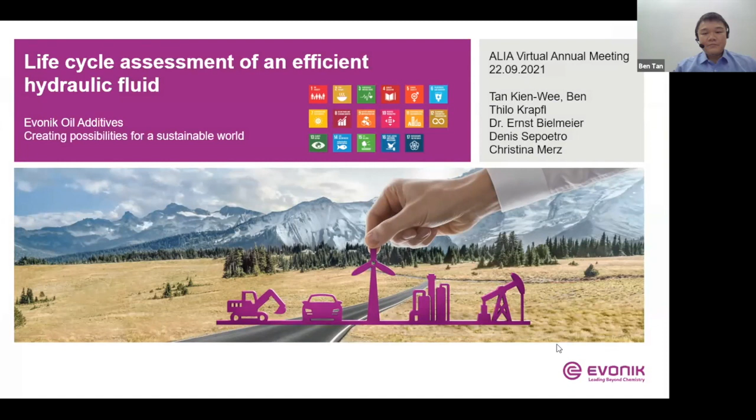Good afternoon again. The topic I'm going to deliver today is the life cycle assessment of an efficient hydraulic fluid. So what does it encompass?

When we talk about this life cycle assessment, throughout this entire presentation we're going to hear the word sustainability or sustainable many times. The Brundtland Commission, in 1987, published their first report called Our Common Future, and in there they defined sustainable development as development that meets the needs of the present without compromising the ability of future generations to meet their own needs.

Moving on to the next slide, the concept of sustainability is composed of three main pillars: the economic, the environmental, and the social.

In another way of defining it, we can also call it profit, planet, and people. There have been people, or even organizations, who think that the planet, the people, and the profit cannot coexist—that you either have profits for your organization, or you take the other route to have a more sustainable planet. This is actually a very common misconception.

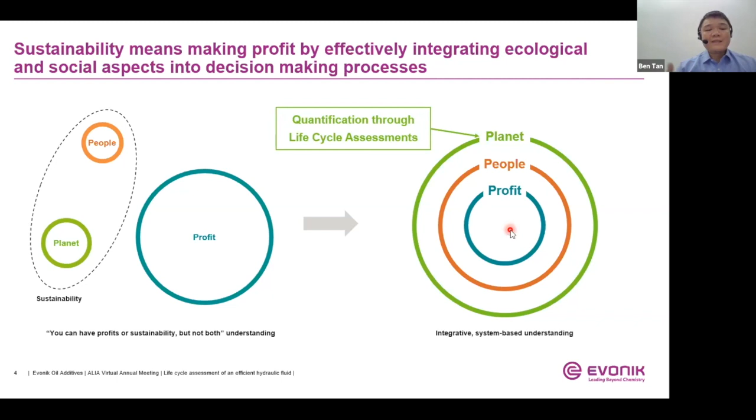Moving on next, I would like to talk about life cycle thinking. When we talk about life cycle thinking, it goes very well beyond just talking about the market price of a product, the quantities, or even the product specifications. It is actually a much more comprehensive product characterization, going all the way from the raw materials used to make it, to the product's end of life. So we can compare various process routes for the same product, or compare alternative products with the same benefit to the customer.

One important aspect of LCA is that it can expose the weak spots and indicate potential areas for improvement, to bring future developments to better a product or come up with even higher performing products. So this approach is not only looking at the usage of the product or the benefits it brings today in a specific application, but it also leads to how the innovation cycle and development of newer products goes into the future.

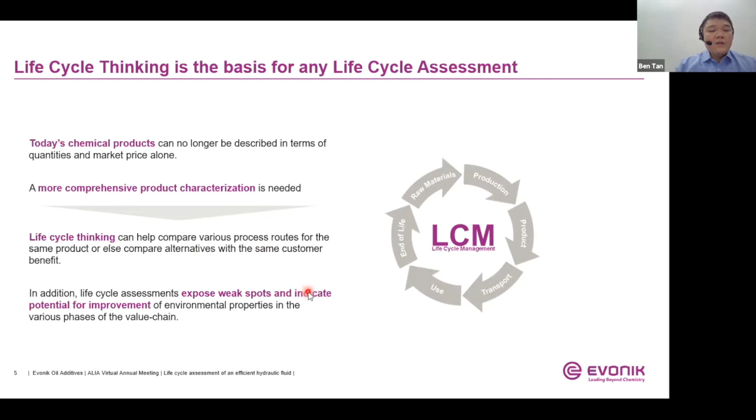In the next slide, I want to help you understand the different terminologies used in the different steps of life cycle assessment. I'm using the example of a typical process chain of production and the use of a material. When we only look at the production itself, these steps are called gate to gate in a life cycle assessment. As we move on to include the material supply as well, and then the production of the product, this will be called the cradle to gate step.

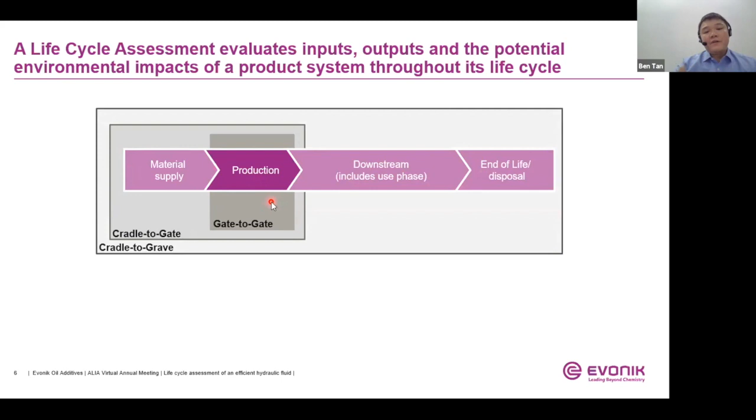If we look even further downstream of the products, including the use phase as well as the end of life of a product, or simply the disposal stage, we call this the cradle to grave. And when there's a possibility to also look at recycling the product when it reaches end of life, or reuse it as a raw material to make the next batch of product, this will be a complete cycle in the LCA, called the cradle to cradle step.

This LCA is basically an ISO 14040 series of standards, meaning all the way from the raw materials acquisition stage or generation from natural resources, to the final disposal stage of the product. In an LCA, various potential environmental impacts are analyzed, and I will come back to this later when we touch more on this.

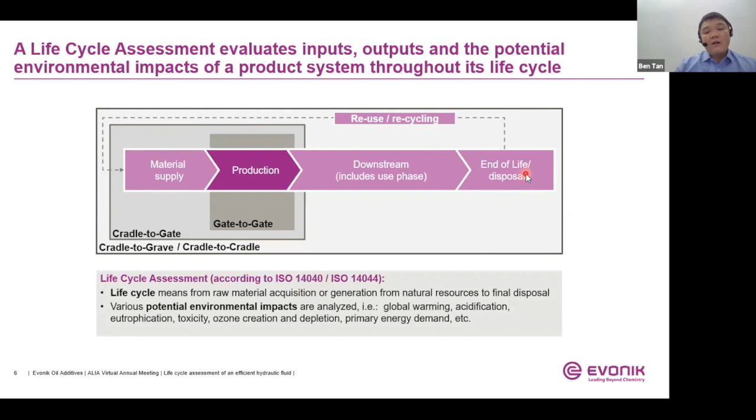The next thing I want to run through quickly with you is the life cycle assessment - how to do it, basically. According to ISO 14040, it comprises 4 steps. The very important first step is the goal and scope definition. The context of the study has to be first defined, meaning that we define the system boundaries.

For example, do we want to take into consideration the entire value chain of the product, or is it sufficient to just focus solely on the cradle to gate perspective? These are the very initial definitions, and the goals or scope that need to be identified. And then the functional units - this is important because it is the basis used to do all the calculation and to be referred to compared to certain systems. I'll come to that in the next couple of slides.

Finally, this will be followed by the life cycle inventory analysis. What happens here? In the LCI, life cycle inventory analysis, we basically quantify the inputs as well as the outputs that we are going to assess. Then after that, we move on to the life cycle impact assessment, where we try to get understanding of the impact of materials and energy flows on environmental systems. These two, life cycle inventory and life cycle impact assessment, are much more objective because they can be quantified.

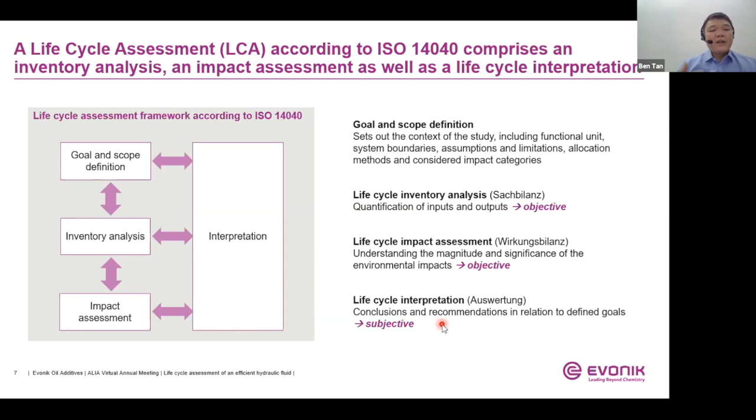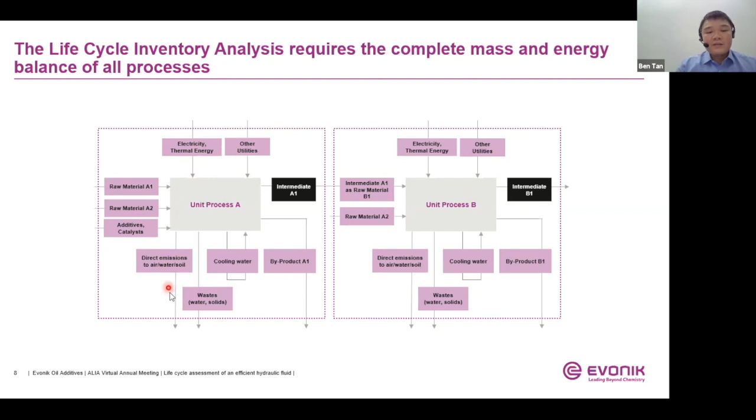Then we develop what are the data collection methods, before we finally execute the relevant inputs and outputs data collection. So like the electricity being used to produce the products and the thermal energy, and then what are the direct emissions into air, water or soil as a result of the product that's being made.

So when it comes to this slide, it's to give you a deeper understanding about inputs and outputs data. Inputs are the raw materials, for example, and what are the primary raw materials that could be used, and whether the raw materials are using renewable raw materials like palm oil because they are renewable, and this should be the main raw materials.

And then what are the auxiliary materials that could be also used as part of the additives to make a product, in order to enhance a product, maybe certain characteristics to make it more sellable, but it plays a minor role in comparison to the main raw materials. And finally, the utilities, including thermal, electrical energy, compressed air, cooling water, and many more.

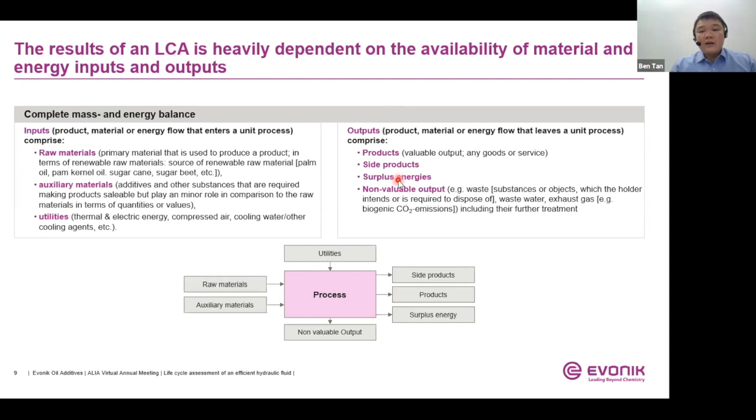So then on the output side is about the product itself - what are the valuable outputs coming from the products, goods or service being offered. And then what are the potential side products that may be churned out during this process. And then sometimes there will also potentially be surplus energy generated. And finally, also potentially the non-valuable outputs, such as waste that is generated or emissions going into the environment.

So there are other methods or methodologies that look at the damage categories - what damage it causes to human health, what damage it can potentially cause to the natural environment or natural resources. So they are quite different. Experts in the community are working diligently to develop this methodology, and they're trying to link them together, the midpoint categories and the damage categories.

At the moment, this is still a work in progress, but it will develop over time. LCA will become more and more objective in the future, and less subjective. But until then, it is very important that when we do an LCA, we need to first define the system boundaries. That's very important right at the beginning, in order to ensure that the comparison we do is eventually quantifiable.

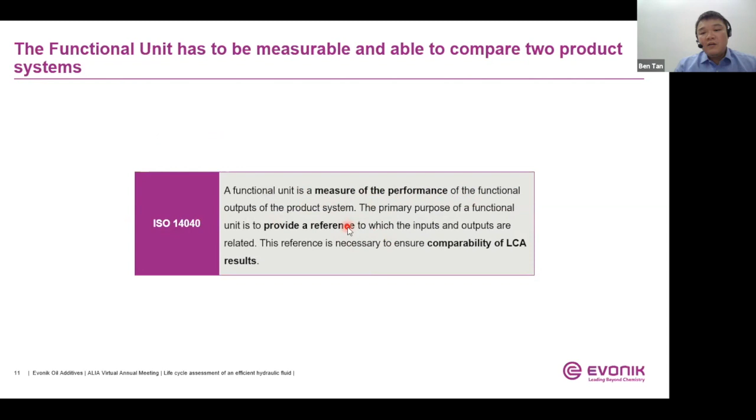In the example I will deliver today, the functional unit is a hydraulic fluid system of a mid-sized excavator, and we are talking about one typical oil drain interval of 2,000 hours. This mid-sized excavator basically uses about 260 liters of hydraulic fluid.

In the system here, we have the monograde hydraulic fluids, and then a multi-grade but shear stable hydraulic fluids. The monograde hydraulic fluid system contains a standard anti-wear package and mineral base oil. Whereas the multi-grade shear stable hydraulic fluid, apart from having the standard anti-wear package and mineral base oil, also consists of a certain percentage of shear stable viscosity modifiers.

As a result of this, we went on to do trials in the field. The monograde hydraulic fluid resulted in an average diesel consumption of about 24 liters per hour of work. For the multi-grade shear stable hydraulic fluids, the diesel use is 21.5 liters per hour. So there's an obvious reduction in terms of the amount of diesel being used. By using these exact same functional units, the comparability of the LCA results is going to be ensured.

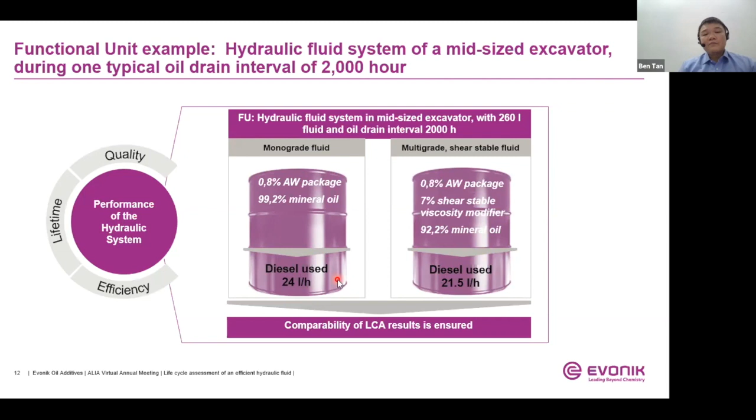But before we look into those results, how does the mechanism work? I'm sure some of you might have already seen this slide multiple times. On this log viscosity versus log temperature graph, there are two very prominent lines: one light gray and one purple. They represent the monograde and the multigrade shear stable fluid respectively. The multigrade shear stable fluid has a much flatter line, due to the higher VI effect.

What it does is allow a wider extension of the whole temperature window, for both the low temperature side and the high temperature side, in comparison to the monograde. But what does this widening window bring? It actually helps improve the hydromechanical efficiency at low temperatures, but on the other hand also improves the volumetric efficiency at the higher temperature side.

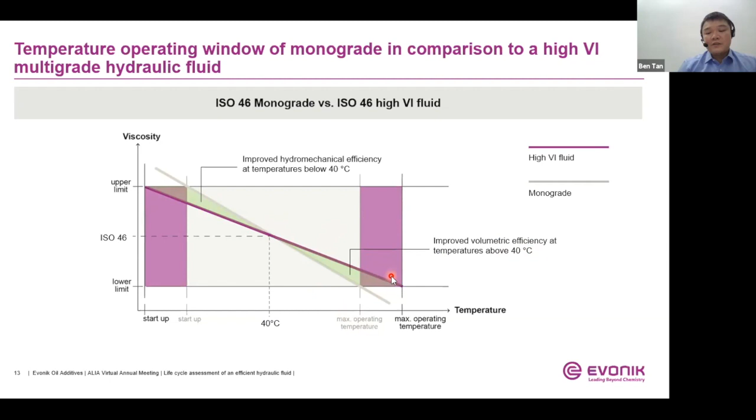By doing so, this multigrade fluid actually led to an improvement in the overall hydraulic pump system efficiency. The trials, or performance demonstrations, were carried out over various years, probably in the last 10 years, at Evonik. We looked at different types of excavators from various OEMs, and there were also specific phases of the test that we had to do.

For example, truck loadings, digging work, traveling, idling. And then there are certain parameters that have to be considered in terms of variations, like the operators, how the engine runs at 100% or 70%, the initial oil temperatures, the starting oil temperatures, and the bucket size that is being used. All these are taken into careful consideration.

Not only that, but during the oil change from one oil to the next oil candidate, we also ensure that this is done properly, in order to make sure that the results eventually gained, the data collected, are representative and significant, and are confident to be used.

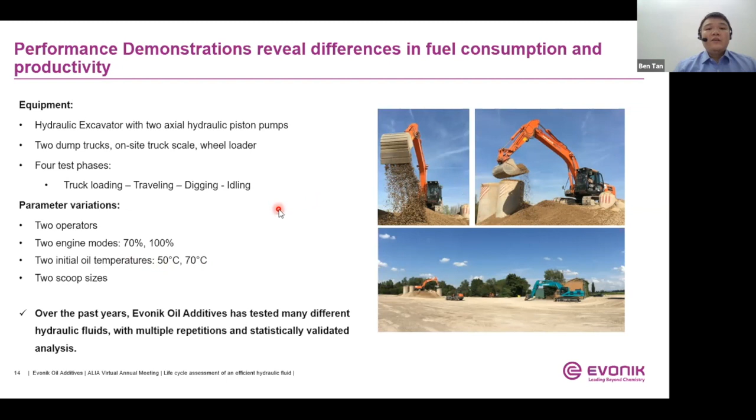Okay, let's look at the next slide. This is the result of the life cycle assessment for the monograde hydraulic fluid. On the right hand side here, you have the value of 238 kilogram CO2 equivalent emitted per cycle.

This is the CO2 emissions from the production of the monograde hydraulic fluids used in that trial. In the trial we also use diesel so that the excavator can operate, and the production of the diesel will also generate a certain amount of CO2, so these are also taken into consideration.

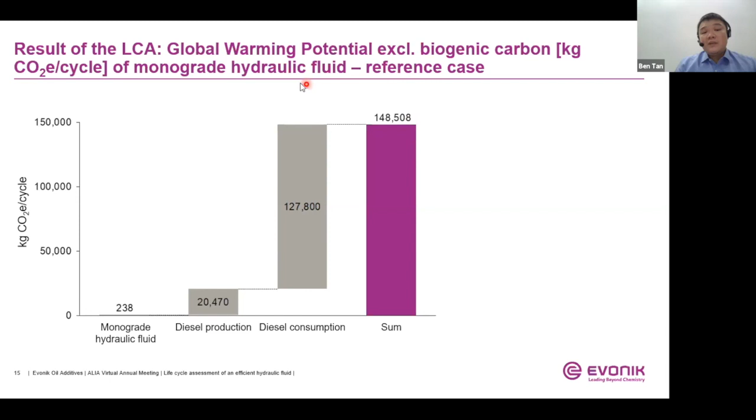Eventually during the excavator operations, it consumes and burns diesel fuel, and this generates a huge chunk of the CO2 emissions. In total, it generates about 148,500 kg of CO2 equivalents throughout these whole operations using the monograde hydraulic fluids.

In the case of the multigrade hydraulic fluid, we're talking about almost the same amount of CO2 emissions from the hydraulic fluid itself, which is 260. The diesel used, so the emission to produce it, is about 18,000, and the diesel consumed during the excavator operation is about 114,000.

This is quite a reduction compared to the earlier monograde results that you saw. In total, it leads to about 132,000 or 133,000 kg of CO2 equivalents emitted per cycle.

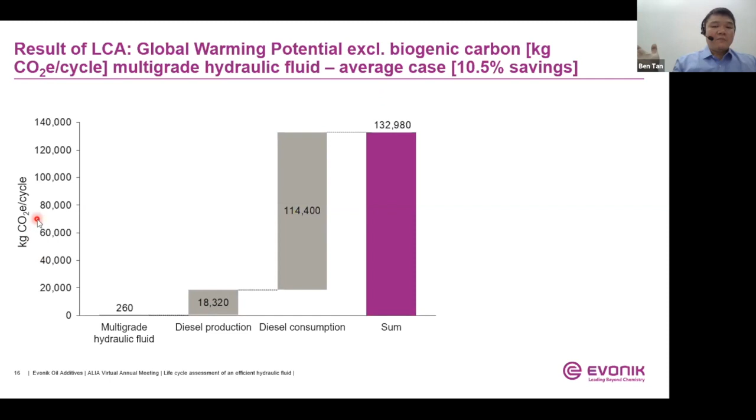There could be very good exceptional cases, and there could be some less than average cases. We should not be taking the best of the whole entire trials over the years. So what we did was actually take an average case, which is about 10% savings in terms of CO2 emissions or reductions.

So comparing them side by side, this 238 kg CO2 is the carbon footprint of the monograde hydraulic fluid itself, and this 260 is the carbon footprint of the multigrade hydraulic fluid. The reductions coming from the use of these multigrade hydraulic fluids is about 10%, which is about 14,800.

If you compare this number, 260 or 238, to the 14,850, it's actually in terms of magnitude almost insignificant, or maybe less significant. Yeah, I should use the word less significant.

But a very important thing I want to highlight is that some people out there actually thought, since the number is so small in magnitude, maybe let us just neglect the carbon footprint of the product itself, and let's talk more about these reductions or potentials of these emissions - this 14,800, or 14,850 reductions, is a term I need to explain to you later, called avoided emissions. That means as a result of using this multigrade fluid, you could have avoided about 14,800 kg of CO2 emission into the environment.

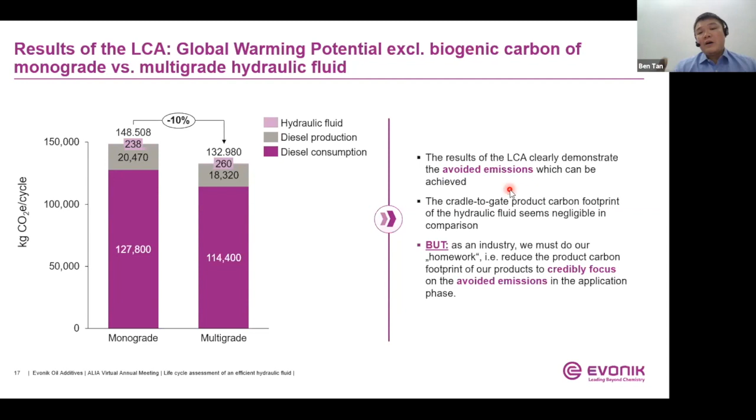But it's also important that we need to do our own homework. We need to continuously work and look at how we can potentially reduce our product carbon footprint. So it's not only about how our products can help others, but about how we can also do something to reduce the carbon footprint emitted during our product making.

So now we move on to this avoided emissions topic. Let me try to explain a little bit. Avoided emissions are actually the emission reductions that occur outside of a product life cycle.

You saw earlier a product life cycle starts with the raw material, then production, then the use phase, and finally disposal. These emission reductions occur outside of the product life cycle, meaning as a result of this product, it potentially leads to certain CO2 emission reductions.

The example that I used today in this presentation earlier, comparing the multi-grade shear stable hydraulic fluid, is one of them. But to help you expand your visualization, I'll give you another example.

Just today, we are all attending this webinar, but in the usual days, pre-pandemic, most of us would be sitting in the conference room together. But now we are all doing teleconferencing. So with teleconferencing, the potential avoided emissions are coming from all the non-travels because we are not traveling, so we do not potentially cause more CO2 emissions into the environment. These are called avoided emissions.

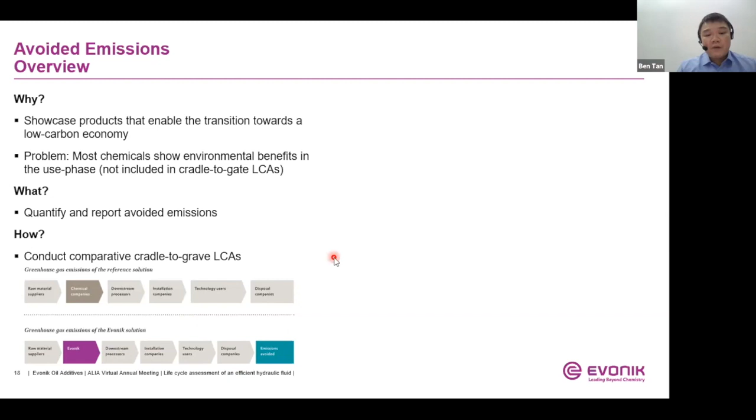There are also other important points to consider when we do such a comparison. I want to emphasize again: the avoided emissions coming from such a system can actually be termed as what we call handprint. In some other resources, you may see them as scope 4.

So there's scope 1, 2, 3, and 4. Actually, this avoided emissions is more like a handprint. I tend to use this word handprint because it's clearer and easier to understand.

The second bullet point is that these avoided emissions, defined as a result of using a certain product, must not be subtracted from our own product carbon footprint, because to do that is actually not right—it's a completely different system. Again, we are comparing.

The avoided emissions usually also include a moving average. It's not something that's fixed because as time goes by, things change, so the life cycle assessment of a certain product may need to be repeated. As good practice, it has to be looked at on a more regular basis, just to ensure that it always stays representative.

Very thankfully, there's a guideline available, put together by the International Council of Chemical Association (ICCA) as well as the World Business Council for Sustainable Development (WBCSD), on the essential role of chemicals. There are guidelines that give you solutions to do comparisons, explaining what functional units are, how calculation methodologies can be applied, and the contributions of different value chain partners throughout the whole comparison.

These are publicly available and can be easily downloaded from the ICCA website. There are also 17 different case studies in there, from all the various different companies.

Next, let's have a look. On the right hand side here, I have an example of the communication on the value chain of avoided emissions by different individual partners in the whole value chain. For example, there could be several different raw material suppliers in order to make the product.

But not every raw material is a main raw material. As I mentioned earlier, some could just be there to enhance certain properties, but there is definitely one main material. And then it comes to the chemical companies.

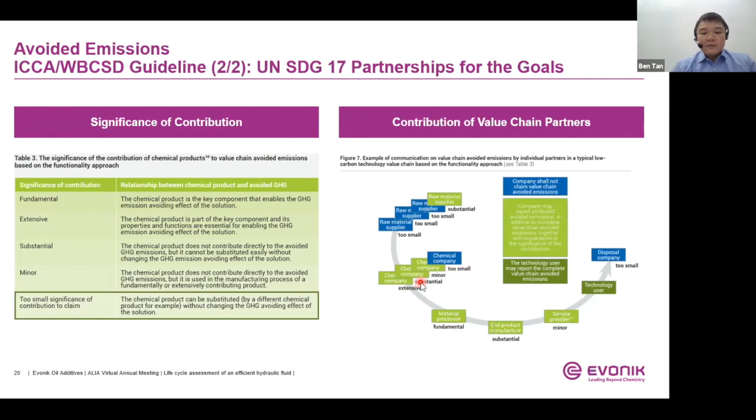This is shown on the right hand side - whether it's extensive, substantial, minor, or too small, in terms of the contribution of the different chemical companies towards making the products in the whole entire value chain partners.

Now I've come to the conclusion slides. To conclude my presentation, we were able to show that the tool of life cycle assessment is very good and can be used to demonstrate that certain high performance lubricants show environmental benefits during the use phase, which would not be included if we only look at the life cycle assessment from a cradle to gate viewpoint.

So here again, the focus is that we should look at the full life cycle of a product, entirely, from cradle to grave. One of the other key emphases I have here is on the critical elements - the boundary conditions or whatever assumptions or averages that we use as part of the whole unit.

for the life cycle analysis being used. It has to be something comparable, so that eventually when the life cycle assessment is complete for the product, it can be something that is credibly communicated and claimed.